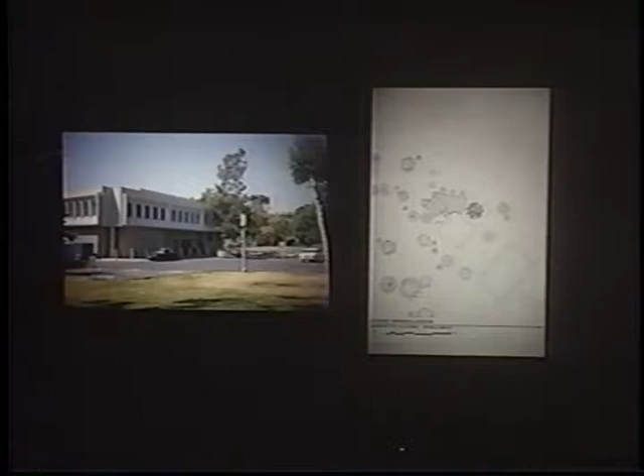The other part we addressed was urban design concerns. My degree is in architecture and town planning, and I've always designed with a focus on urban design and town planning concerns. In this case, it was about energizing the pedestrian ring, the organizing factor at Irvine, where most older buildings are set back so far that there's no pedestrian edge.

So not only did we propose moving forward from the bad idea of sitting on an active earthquake fault, but we also proposed reinforcing the urban edge.

It seemed to me that when you do an addition to an existing building, you have a continuum of choices—you can mimic the style of the existing building or contrast with it. Somewhere along that line you generally make a choice of design approach. In this case, we chose to express the whole continuum: next to the adjacent existing building, we mimic it in mass and scale.

As we move away from it, we begin to erode that idiom and develop a completely new face and elevation for the building. These buildings were built with very small budgets, essentially no opportunity for detail beyond the minimum required—so the code-required handrail and elevator for handicapped access, and daylighting, become the primary energizers and decorators of the interior atrium space.

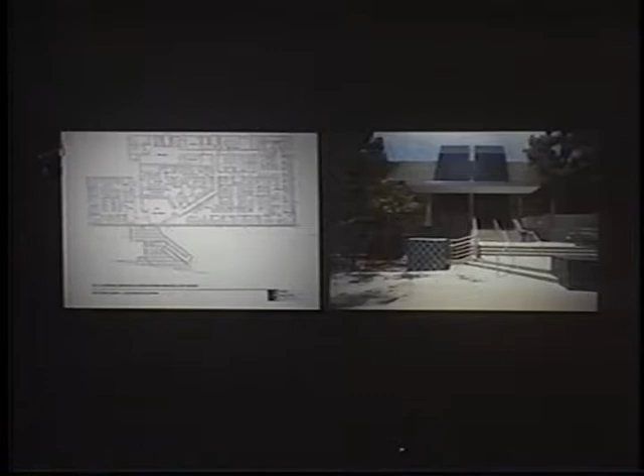The fact that I was using the discussion of gas stations and drive-in movie theaters as part of the parti for designing the entrance canopy to parking structures is completely irrelevant to the folks in parking services. The only thing they want to know is whether the banking facility and the lines for students really work. Maybe we need to find ways to discuss things in our clients' terms while raising their confidence that they need to believe in us for the exploration of architecture.

The next project in the UC series was a small childcare center. The primary reason we got it was convincing them we could meet the schedule—nine months from design through completion of construction, a year total. Again, extremely low budgets, pushing the envelope of design here at our expense, certainly not because that was a primary concern of the client.

By the time this project on your left, my right, is a project now under construction at Scripps, which is a small steel-framed building stepping up the hill. By the time we finally got to this one, which is about a $3.5 to $4 million mixed-use project, we were finally being selected at least partially for design and for the ability to work within really complicated and specific site conditions and constraints.

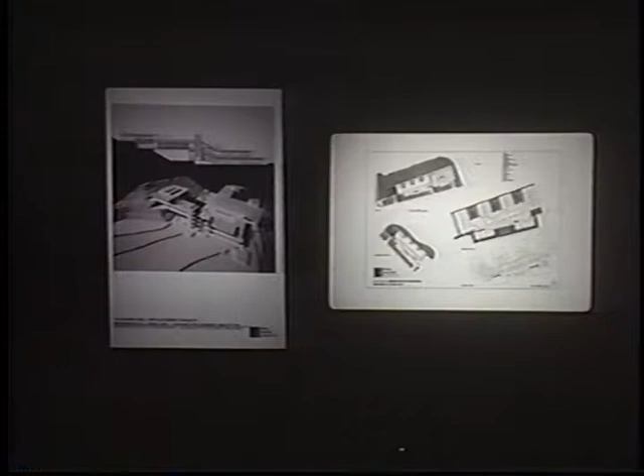We started the design of a project on a really beautiful site at UC Santa Barbara, but it turned out it would take 2 years to de-water that site, so the project was abandoned and we moved on. It has taken me 10 years to get to the point where we were selected for design. Let me go back.

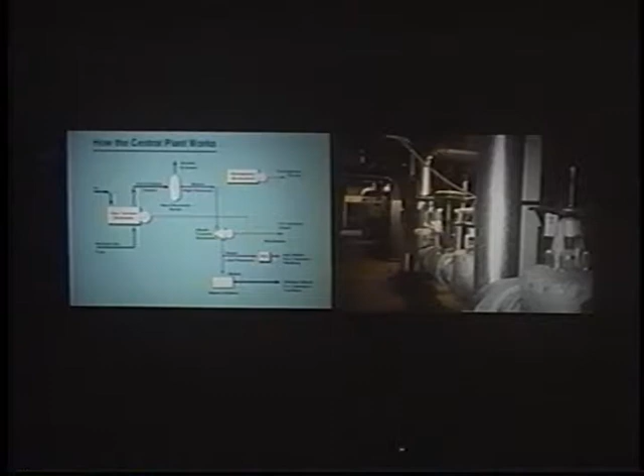Well, have we? Okay, so you'll put it in correctly for me, thank you. Every lecture has to have at least one backward slide or it doesn't qualify.

The first project that we were selected for on a UC project based on design consideration was for a very strange building type: a new central plant for the UC Davis Medical Center. It's basically a building housing big, ugly machinery—kind of neat machinery if you really get into it, but big, heavy-duty machinery—supplying chilled water, hot water, and electricity to the campus.

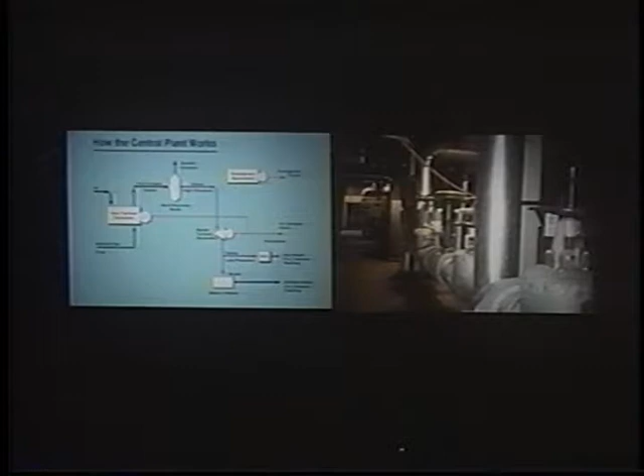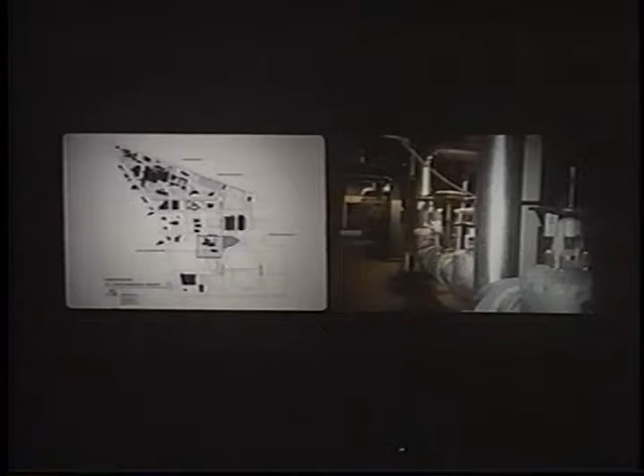It's an interesting design constraint precisely because it has urban design constraints. It's located on a primary entrance to the campus, adjacent to a residential neighborhood, and the neighbors were very unhappy about having a big industrial plant next door to them. So the campus committed to hire a design architect to team with the production architect and engineers they had there. And while Antoine Predock got the enlarged project at UC Santa Barbara that I lost, I beat him on this one.

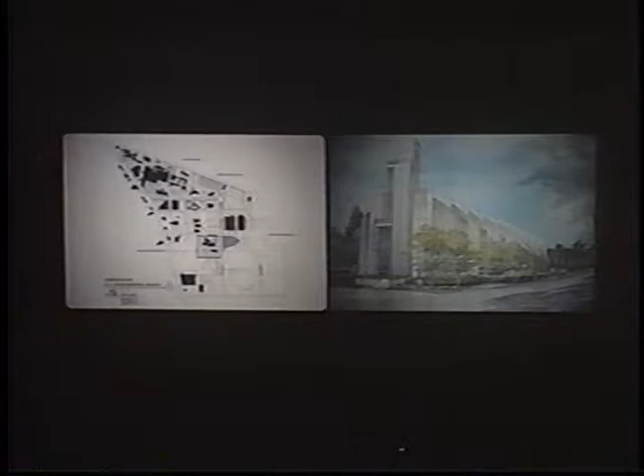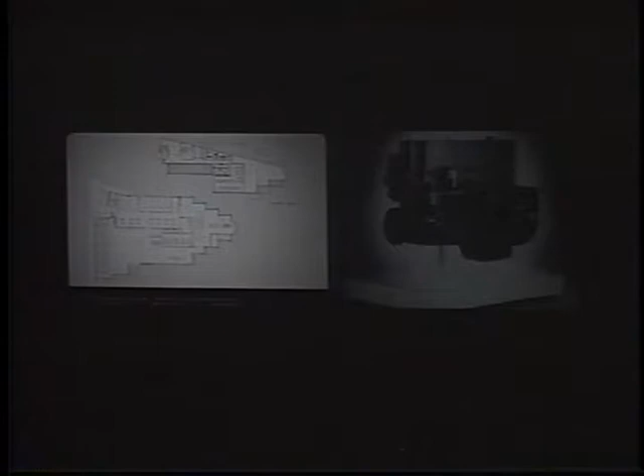It became a unique opportunity—perhaps a little less of an opportunity to showcase what I think is beautiful about the industrial reality of the project—but nevertheless an interesting and important exploration of what makes a central plant as a machine really work and really tick. In this kind of project, if you don't place the right proximity between two pieces of equipment, and you're dealing with pipes 5 feet in diameter connecting them, you can blow your budget just on the relationship of the pipes you've put in there.

In the last couple of years, I've tended to develop a series of layers of explanations for why I'm doing things. I tell them to myself—I don't necessarily tell them to the client, because the client could be made excruciatingly uncomfortable if we insist on telling them all of our architectural stories.

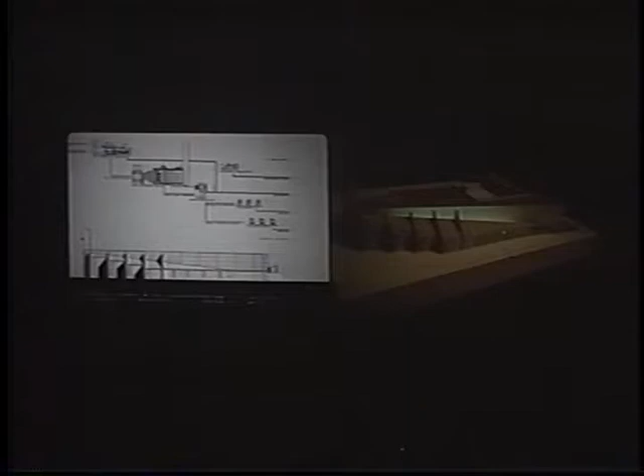I was really interested in the cogeneration process, which is called an energy cascade. You start with one form of energy, run it through a turbine, produce electricity, take the hot water or steam generated from that, run it through another turbine, produce more electricity, then take the byproduct—the reduced energy—and continue to reuse and reuse it. It's an extremely efficient method of taking the maximum energy out of a process.

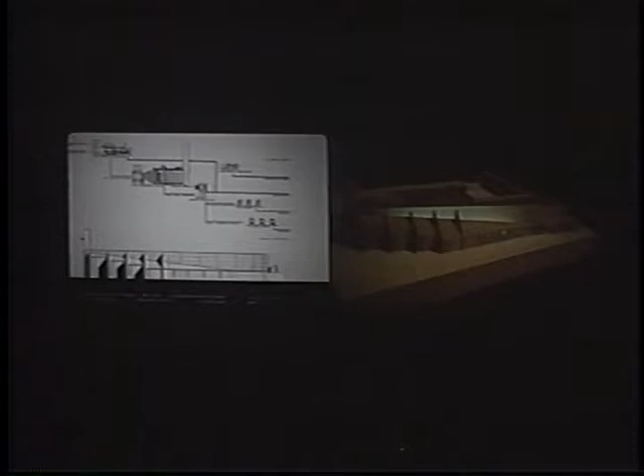So the Kalwall wedge and the form here came off of the metaphor of the energy cascade, the event occurring behind the scene. But it's equally about the fact that the Kalwall provides daylighting so we don't have to turn a single light on in the factory during the day. And the Kalwall becomes expressive at night of the fact that this is a 24-hour facility, so it's backlit and tells you the building is alive and active.

It's also about the fact that this used to be the site of the old state fairgrounds, with barns and wonderful agricultural exhibits. So all of the materials of this project, other than the Kalwall, are really concrete block and corrugated metal—the kinds of shapes and forms that would have made barns and been part of that experience.

The windows also showcase all of the equipment, and we even have an opening down to the basement so you can actually see the 5-foot diameter pipes leaving the building carrying the hot water out to the campus. I did try to convince them to weave that through the landscape of the campus and make it visible as part of the infrastructure, as part of the design, but I lost that discussion.

Another client that we've had for the past 10 years, that we've developed a relationship with and grown their design ability and aesthetic and their willingness to even consider design issues, is LA Unified School District. You haven't had the pleasure or misfortune of working with LA Unified School District yet, but I'll tell you that doing a $2.5 million addition to a building, an elementary school, takes 10 years, which means you lose your shirt, and by the time it's done you're also really tired of what you did 10 years ago, so it's really frustrating. This project, we took to the project manager and project architect at the district.

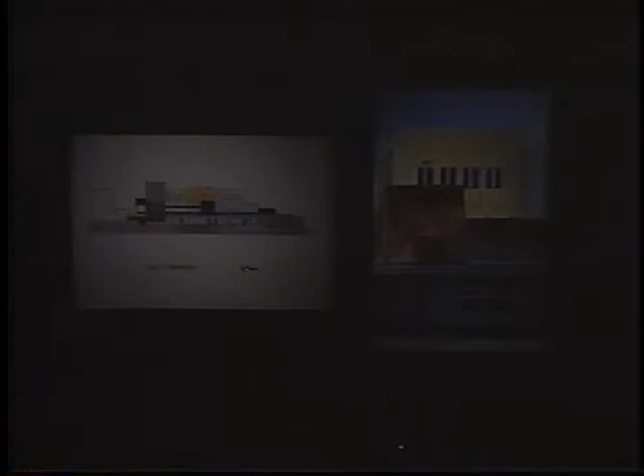We were able to finally, in the last six months, complete this first project we did for LA Unified School District. The next project we got was a junior high school addition, and we started with what could only be described as a war-torn asphalt courtyard that was excruciatingly tortured. We defined and designed a very simple building that recreates a courtyard, makes a new place, and starts to define the edges.

One of the interesting things here is that the older historic buildings of the school were used regularly for filming, so we had to stay away from those edges, because that was the only way they could pay for art, music, and other components at the school. You never know what's going to become part of the constraints of an architectural project, because I certainly didn't want to get in the way of funding for the arts at a junior high school in the middle of our city.

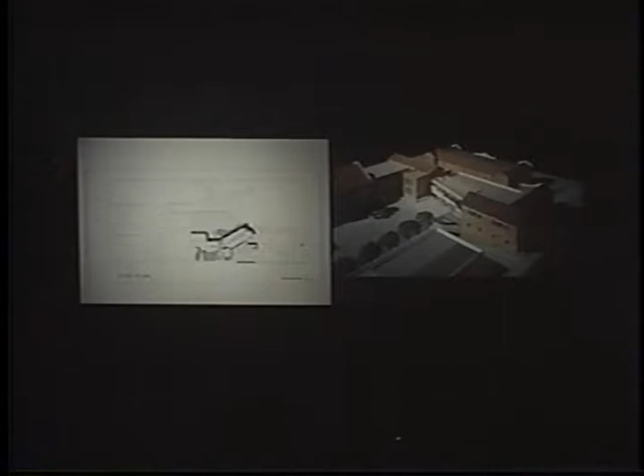The next project we did for LA Unified School District was a complete elementary school that's never been built. It has in it seeds of ideas that I think are really important for schools here in the city, and that I've begun to campaign to try to make happen, because it's a shared-use facility - a total community center sited in a park that reduces the footprint of the school from the typical 8 acres to 3 acres, and pulls out the library so that the library can serve the community as well.

There's a front door that's a public entrance and a back door that's the school entrance. There's a separation so that the entire multi-purpose room and gymnasium component could be reused as part of a community center component. So thinking in terms of social responsibility, we've been attempting to redefine the nature of the program of architecture for the LA Unified School District.

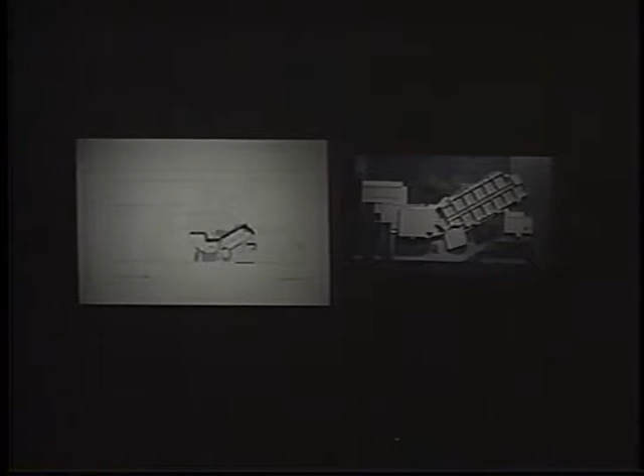Another key piece here is that security is an excruciating problem, so these elements are actually garage doors that open to become a trellis during the day, and at night close down to become security screens that lock the place up completely tightly, because everything walks off of public school campuses.

One other feature worth mentioning: when you deal with clients like LA Unified School District, you do one set of renderings for the client and one set of presentation drawings for yourself as an architect, because the client needs those that feel comfortable, touchy-feely, with children in them, and they don't really reflect the way we would typically present and be interested in an architectural project.

Coming out of this, we went into the competition that Thom Mayne won for the Science Museum Elementary School on the grounds of the Museum of Science and Industry, and explored what I think was a really interesting relationship - defining a precinct, creating a central courtyard that was the central classroom for the entire school, with some really key features, and some really interesting ideas about flexibility and the integration of art - and science as art - into the nature of schools and places for children.

We were recently hired by the City of Glendale to do a park expansion, community center, new library, and new elementary school, and I think I'm finally going to get to use a lot of the ideas embedded in both of these projects, as well as take them to the next level and next stage.

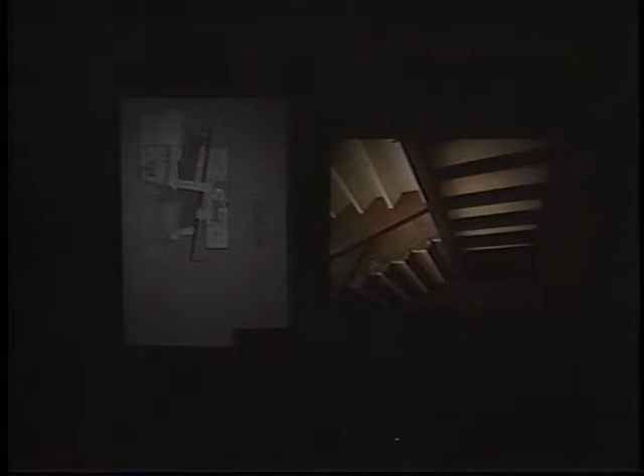In this case, the stair is a beautiful cantilevered structure coming out of a Venetian plaster wall, and the treads are limestone spanning between them. The bridge across shows you that structural reality, and it was a lot of fun to play with.

Obviously, the air traffic control tower was a major and important turning point in my career. It's a little scary to build such a significant monument at a relatively early age. I hope I will have opportunities to do projects equally exciting and equally significant as we move along.

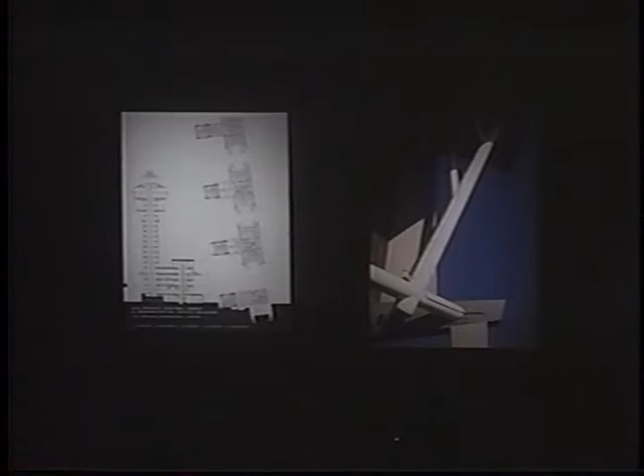The stories architects tell themselves have to do with making a symbol of arrival in Los Angeles, and the palm tree, while not native, is a ubiquitous symbol of Los Angeles. Here we were with this very weird building type - essentially a huge stalk with 2 occupied floors at the top, nothing else in the middle. Los Angeles is also home to an extraordinary heritage of construction, fabrication, and manufacturing of aeronautics, aerospace, moon landing gear, and everything else, and I went looking at all of those pieces. So we came up with this hybrid of the struts of a biplane and the organic qualities of the palm tree. Every time I told any of those stories to the air traffic controllers, they would make faces and tell me it was okay, the building was disgustingly weird, and they were lucky because they'd be occupying it and wouldn't have to look at it.

If I could get it through that weird Cultural Affairs Commission, that was okay, because the primary hindrance wasn't design—they didn't give a damn about design. The primary hindrance was the Cultural Affairs Commission holding them up, because they couldn't build a tower tall enough to oversee the airport. I hate to tell you how much they couldn't see from the old tower, and they couldn't put the new equipment in. They'd been fighting with it for 10 years, so they were tired of that game.

So what I did was make every one of those rooms on the air traffic control tower a simple rectangle. These guys could not cope with the concept of weird shapes of rooms—they were equally rigid, men and women alike. All of what we're doing that makes the tower a special place is in the 3-dimensional form, which doesn't get in the way of their notion of function. You must find a way to establish a language with your client that is an acceptable process.

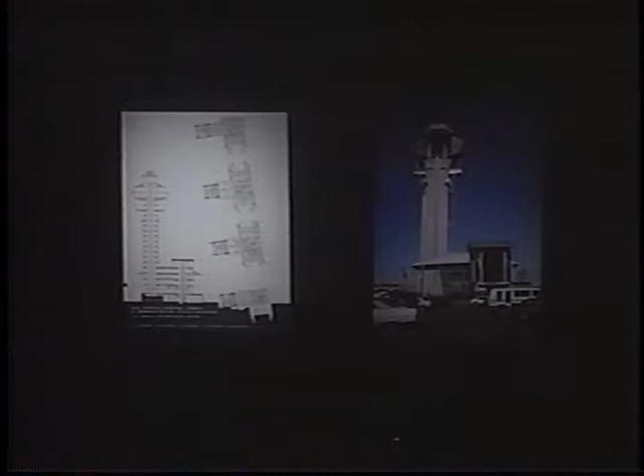As I said before, one of the first and critical things we did was take the radar balconies, put them at the right height, and pull them out of the trunk of the tower so they could face the correct direction for the airport and really serve the functional needs of the FAA. The first and only person who supported the design for the first two months was this great little engineer who said, well, it's a weird-looking building, but it's really functional. That was the total extent of support I had from the FAA.

On the other hand, when I took the original and initial sketches into the Cultural Affairs Commission, the commission was unanimously enthusiastic. Michael was in there telling them they had to let me build more models and have a good time, and I was building more models, and they were thinking I was really weird. So there was this bifurcation—in effect, I had two clients. One of the things that really works is when your client has multiple people who represent different voices and different critical concerns. If you can find that kind of client, and one of them cares about design, you can satisfy the functional requirements of the other client parts and make something really happen.

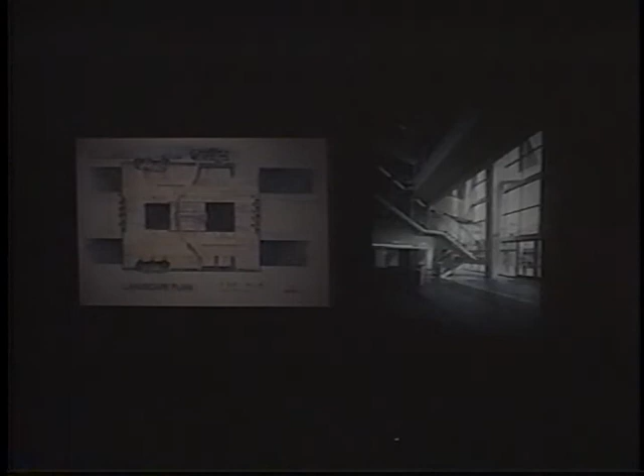Another collaborative element of the design was the landscape, which in a sense is almost non-existent. But the plaza, which is both the parking and the lobby, was designed with Pamela Burton and Katie Spitzer, back when they were in partnership, as a landscape viewed from the sky, and became a critical part of making the lobby space really successful with very low budget finishes and materials.

Unfortunately, as you can guess, the tower is not a public building in the sense of allowing tours—security is a critical component, and I'm really not allowed to photograph the cab level. The cab, where the air traffic controllers work, is the prototype that's replicated across the country, and controllers train in various places, so I want them to find the equipment where they expect to find it. That was one of those things we did not change one iota during the deconstruction of the original prototype design.

The tower, with its base building of office components and transparent lobby space, is meant to be both viable and powerful during the day and at night. The wing component connecting the two pieces houses the computer floor with all the equipment supporting the air traffic controllers above. The roof is an open-air balcony, and the top floor is a break room; the rest is basically office space supporting the FAA's use of the tower. The tower itself is occupied on two floors—the control tower floor and the break room floor below it—everything else is a stair shaft, elevator shaft, and cable trays.